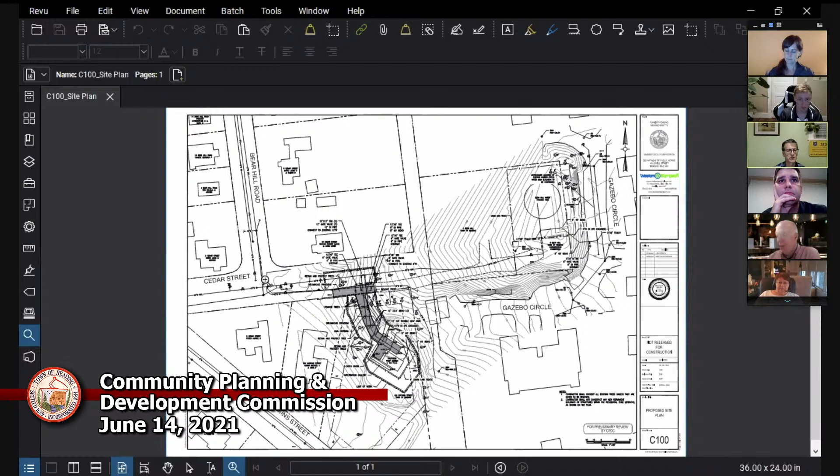So the pump station, as Ryan mentioned, is on a site that borders Hopkins Street as well as Cedar Street off of Bear Hill Road. Access to the pump station will be off Cedar Street, that's where the water main that currently heads up to the water tank is, and that'll be the suction supply for the pump station.

For those of you that have seen the site, the site has been, I guess, sculpted, as you could say. As Ryan mentioned, it's kind of like a golf tee. It's got a high point up in the upper right corner, and then there's a flat area where we'd site the pump station, and then a little bit of a hill drop, and then it's flat out toward Hopkins Street.

So the pump station, as Ryan mentioned, will be pumping water. What it'll do is it'll draw water from the water main in Cedar Street and pump it into the water main that circles around Gazebo Circle, and also back toward Hopkins Street, or South Street rather.

So what you see on the site plan is the gray hatching, which is proposed pavement and road extension. We'll be extending the road up Cedar Street a little bit, creating room for plowing, and then a driveway into the site with a T turnaround.

The road, or the driveway, will drop about 5 feet from street level down to the site. The pump station itself is about 16 by 25 to 30 feet long. As Ryan mentioned, it'll house the pumps, control equipment, and other issues relative to the site.

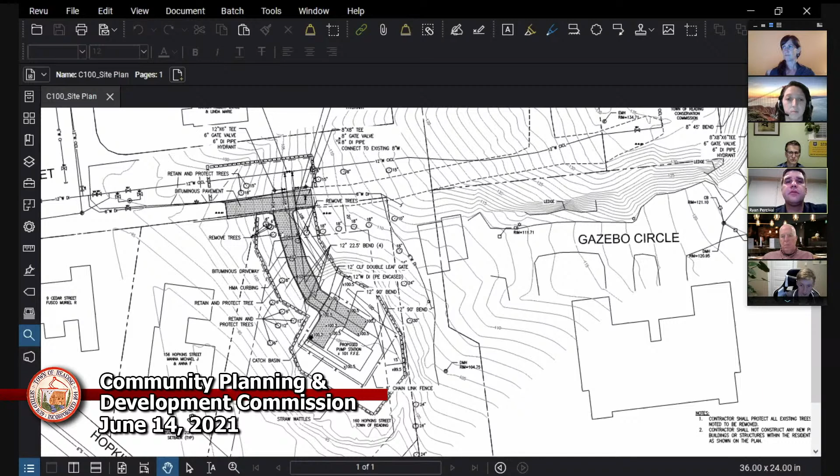Okay, at this point. And then an idea about how often someone would need to come to this facility? Typically it would be at most once per day or a few times a week. So really, worst case is one visit a day, and Ryan can back that up if he wants. Unless there's something going on there, like some repairs, in which case there might be some utility trucks there. But otherwise it'll be a very quiet site. Just to add to that, it's generally once a day, and it would be during work hours. Okay, thank you.

Other questions from the board? Yes, I have a question. I'm looking at this plan and I'm seeing 10 trees that will be removed. Isn't there a better access off Hopkins Street? And why did you not choose to go that way for creating your paved area?

Yeah, we came in because all the utility, at least the water main utilities, were coming in that way, so there's excavation required to come in that way. Okay. But we could potentially bring just the utilities underground and bring a road in from Hopkins Street.

One of our thoughts was that we were trying to keep all of the construction activity and the future use on the northern part of the site and leave the southern part open for recreation and access. With a driveway there, that might cut down some of that ability. But I think that's really a call for the town to make. We will design it either way, and this was our concept, so that's subject to change.

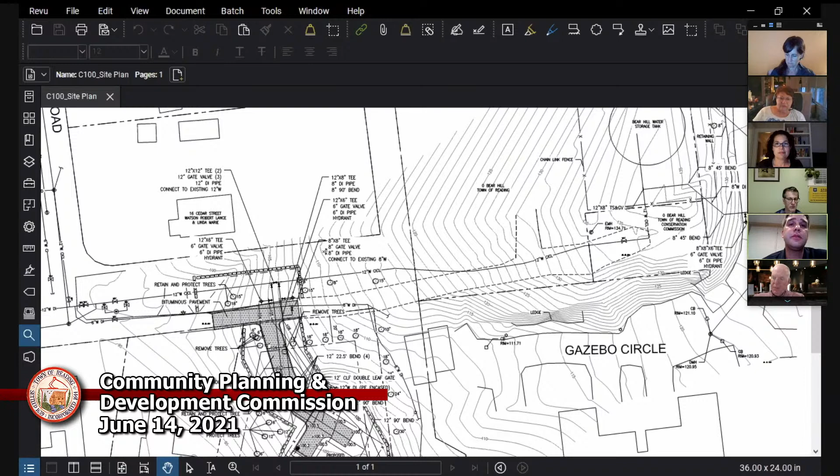We went through the same sort of discussion on the water tank project, and we have the ability to pick any color. Plastic, black usually is the best. It does disappear better than green, believe it or not. And we are actually not going to put up barbed wire in this case. I think a 10-foot fence would suffice, or 8-foot.

Okay, my other question is this. I thought the illustrations of what the design and how tall it would be were really helpful. And I'm wondering if those were available for neighbors to see in advance online. A very specific thing is somebody reached out to me saying, hey, I'm looking for like an elevation view or something. I'm just wondering what chance the neighbors would have had to get a feel for what the actual look of it would be before this meeting.

We can certainly provide an elevation view. I don't think that's an issue at all. I think one hasn't been provided yet because I don't know if we were certain on how the design was going to look after this first meeting. So we can put together elevation plans for the building—they have to be put together anyway, so we can provide those.

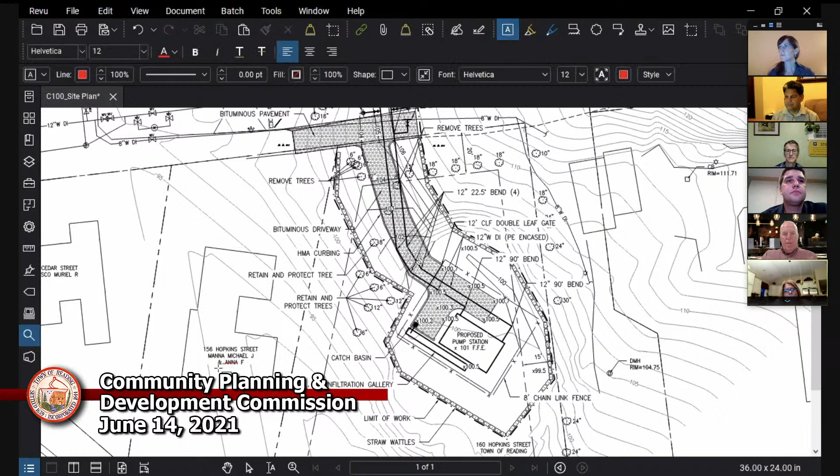One of my first concerns is when the surveyors were out surveying, they first were surveying up by the water tank to see if it could be put up there. So I'm just wondering, why was that ruled out instead of putting it down here? That's my first question. Okay, I can field that one.

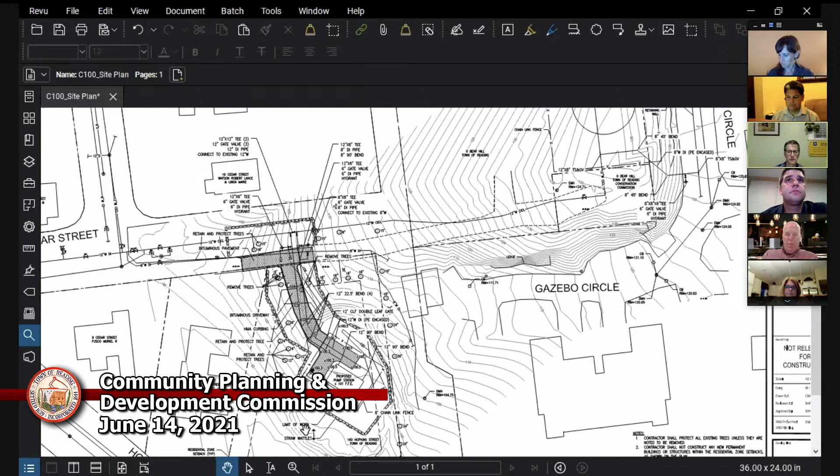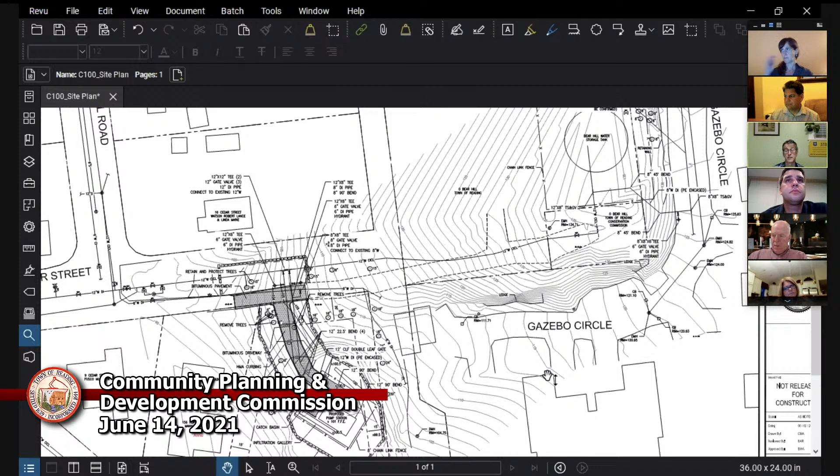The DEP requires a certain pressure at the pump station so that the pumps can pump effectively. And the elevation at the tank being much higher, that pressure is not high enough. So pump stations that increase pressure to areas are almost always at the bottom of the hill rather than the top, because they can push water up easily, but they can't suck it up, essentially, is what happens. And what can happen is when the pump station, when you need it most and the pressures are low, the pump station won't work to do what it needs to do. So that's the reason it's not up on the site. It's really primarily a hydraulics pressure issue, following state guidelines that we always need to make sure we have enough pressure on the pump station suction side.

We should add, if I could chime in here, we actually have some water main work up at the water storage tank, which is the primary reason the surveyors were up there in the first place. So Cassandra, if you could just zoom in up by the tank a little bit. And to Ryan's point earlier, for the redundancy, if the pump station does go out, we have this point of connection now, or we will have this point of connection to the top of Gazebo. And there's also the connection at the Gazebo Circle entrance.

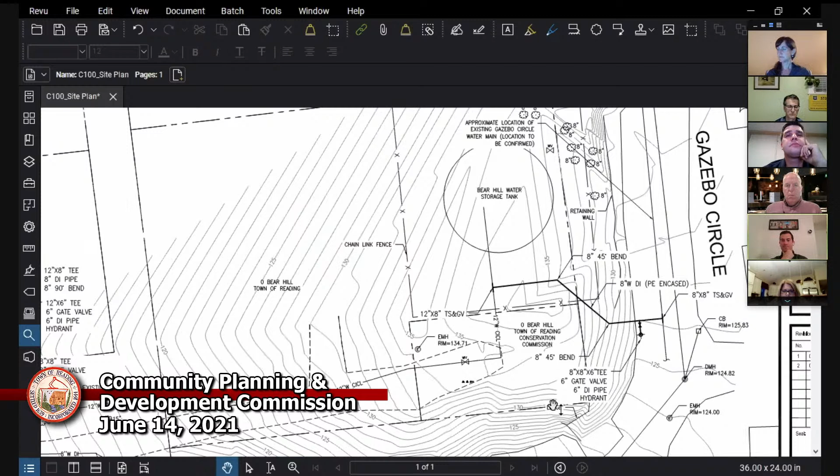So could you have an entrance up that way by Gazebo instead of coming up? No, the pump station has to be lower in elevation down the hill, and this is the best available site for that. The water main Ben was mentioning is really just to provide additional looping of water mains for better fire flows to the area. And that water main will now loop through Gazebo Circle and come all the way back down Hopkins, providing better redundancy for the whole neighborhood up there.

And I will add one thing: if you notice the plan, the driveway is shown kind of right on the property line. We're working with the town to identify exactly where the property line is. At least with the information we had, just from assessor's mapping at this point, it would indicate the road sort of meanders over onto your property a little bit. But anyway, just to let you know, that property corner will be fixed to assure there's no adverse impact to your property. Well, maybe I'm not understanding this map, but isn't it going straight up like Cedar Street, where there's already a dirt road there with the chain?

So wouldn't it be going up there? Up there, yeah, and then taking a right, probably up behind our rock garden. Right, we just want to make sure that we do have a line of hay bales set on the downslope area, and we want to make sure that no runoff, no construction debris or anything like that rolls down the hill into your rock garden.

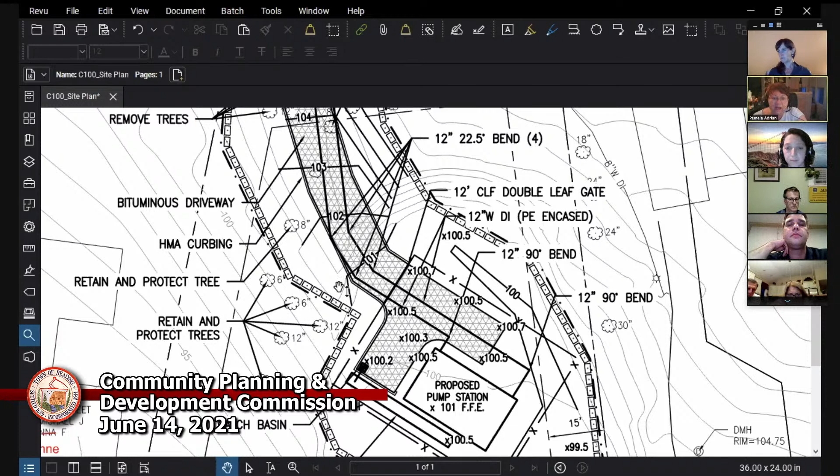No, I understand that. And then these are retained, as well as these, and these are also retained, so it would only be 6 trees. That's correct—six trees, but keep in mind 3 of those are 6-inch caliper trees grouped closely together. So if we were to replant in that exact corner, you may only get maybe 1 tree in that corner, and then we'd have to probably plant one a little further down just to make sure the placing is far enough apart so the growth can actually happen for those trees.

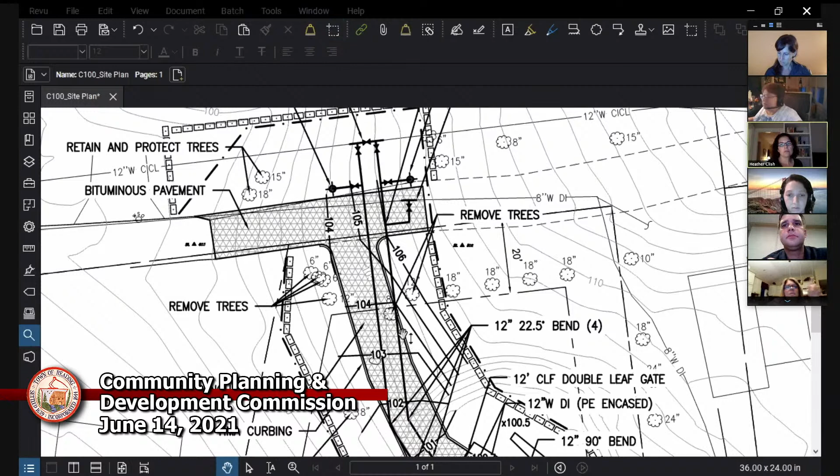And I have one last question too. I'm just wondering, is it going to have a light that stays on 24/7, like Gazebo has their lampposts, and especially in the winter they are very, very bright. I'm just wondering what type of lighting you're going to have there.

The lighting is really flexible and it's up to the town. Anything is possible—some towns like a light on all the time.

What's typical is the light that you see over the doorway, a small black fixture. They're typically on a motion sensor and would only turn on when somebody walks up to the door. But there is usually a switch on the inside, so you can leave it on motion sensor, turn it on if you want it to stay on while you're working there, or turn it off if it becomes a nuisance. We try to design these with full flexibility, because sometimes even with the motion sensor, just leaves blowing around can turn the light on.

So there won't be any high lampposts or anything like that. There is no intent at this time for a light that would be on all night up on a pedestal or a post. That's correct. Okay, thank you. Good question.

And to follow up on that, I assume, correct me if I'm wrong, that in a location like this the intent would be that it would be on a motion sensor. Yeah, we would probably start off with a motion sensor, see how much it gets tripped off by animals or anything like that, and then adjust accordingly. For something like this, it's a pretty secure facility with the fence and the doors, so routine maintenance is really why we're only there.

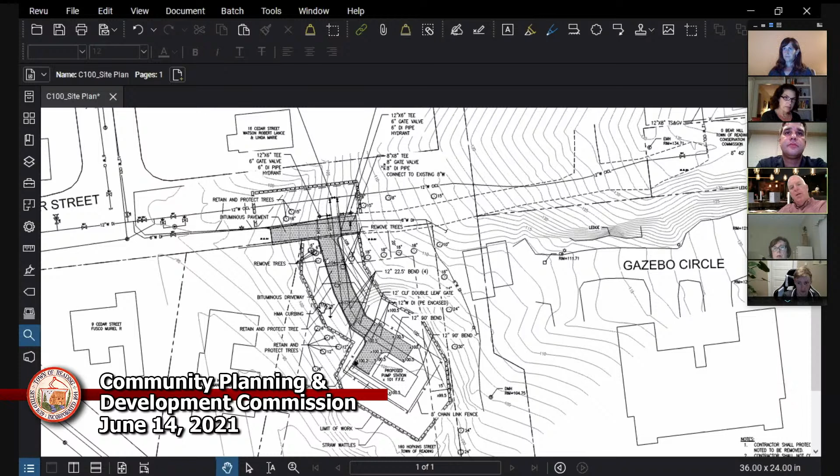I guess one other thought, Ryan—I know you talked about replacing the trees that are there, and I know you want visibility into the site, but I'm wondering, once you come up with a final configuration, whether there's some additional screening, whether arborvitae or other landscaping, that might be appropriate—not to create a complete buffer, but maybe a little softening so they're not looking directly at chain link fence. Yeah, I'd be happy to look into some plantings we can do, and maybe it would be beneficial to meet on site to see what might be possible.

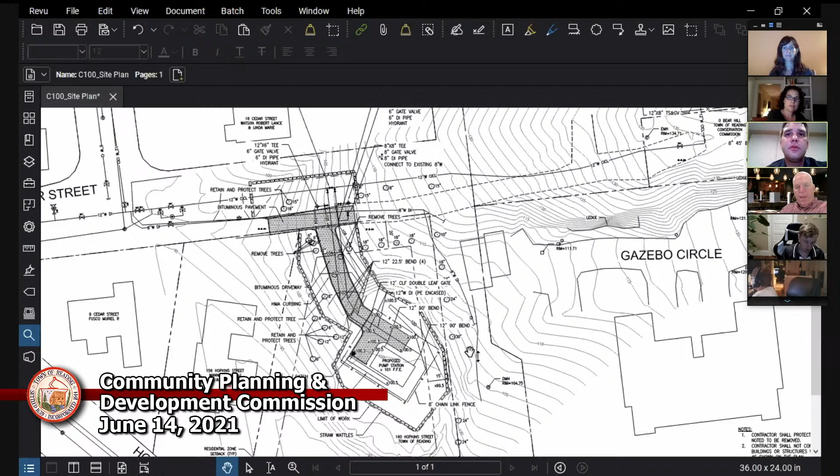And then the other thing I was thinking is, I don't know if you've done a lot of stormwater design up along here, but whether there's an opportunity to use the water that comes down this road that's not quite paved—whether something could be done to intercept those flows before they head toward Anne's house. Yeah, we did look at that, as most of the lot grades down through the Gazebo itself, and some of it touches the northeast corner. We'll see if we can intercept as much as we can. I know there's a swale on the northerly side of the property, near the 100-foot contour that wraps around the back of the building. Yeah, there's a 100 contour just north of the driveway.

Oh, yep. Nope. Let's go a little bit. Right there you go. Right there.

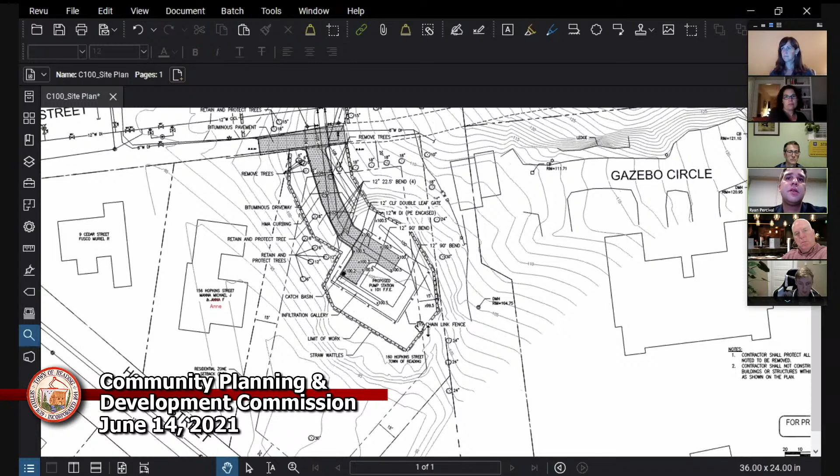So that's the intent of that, is to direct anything coming down off of that northeast site in and around and down the way it's coming down. There's a swale on the easterly side of the property as well. You can kind of see it.

That will effectively channel some of that out. Most of the runoff now will be intercepted by that driveway and mitigated that way. So once we know what the soils are a little bit better, we'll size that infiltration gallery or porous pavement, or both, appropriately.

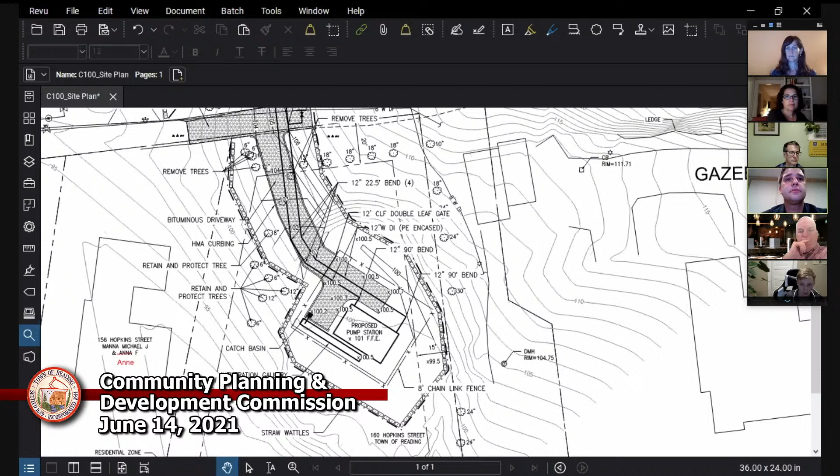Great. Other questions or comments?

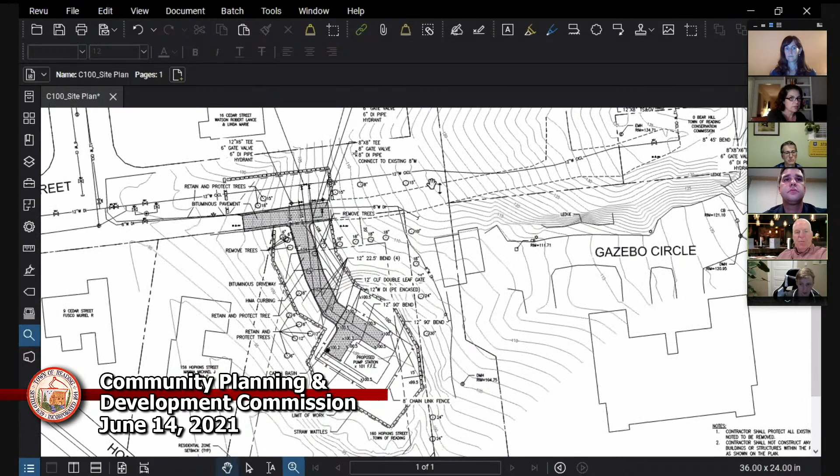So Ryan, I think there's a couple of things here, right? You're going to come back to us with some potential redesign, maybe not, maybe it'll stay the same, but sort of confirmation on the design for that site access for the driveway. I don't think you heard any concerns or criticisms or design direction related to the building itself. I think what was presented seems to fit pretty well.

And then certainly doing a little more digging on if there's any deed restriction, or probably, well, obviously there's not a deed restriction, but any other sorts of restrictions or promises that were made related to recreation on that site.

So, confirming that, and in the meantime you're going to meet with the neighbors to identify what trees you're looking at taking, and the layout of the site, and if there's other smaller improvements or tweaks that could be done to the design to make that all work. Right? Correct. All right.

So I think that we do need to continue this. Not major issues, but some issues to resolve before I think it makes sense to take a vote on this.

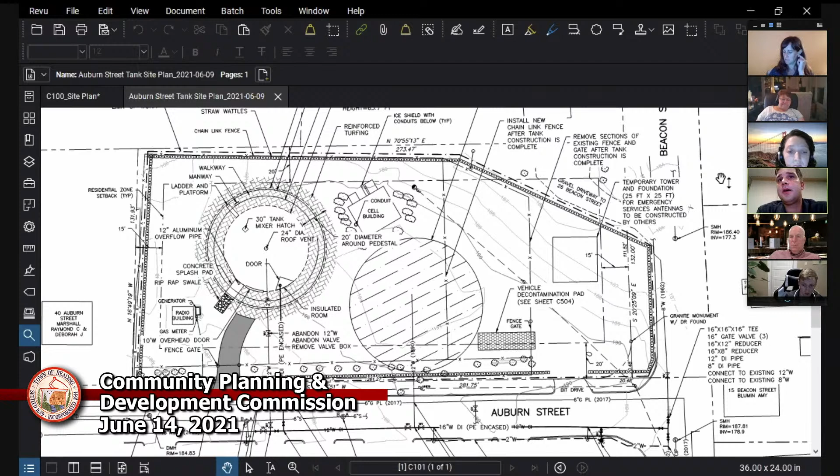And to answer your question, we're in the process of drafting the RFP, which the carriers are very interested in for obvious reasons because of the temporary structure they're constructing. But they're looking for a more permanent solution, as well as we are, on the new water tank. So that RFP for the leasing is being drafted right now with procurement, myself, and town counsel, and hopefully that'll be going out soon so they have a permanent location to go to.

That'll be more advantageous for their signals to go back on a higher tank than to stay on this temporary structure. It's more advantageous for them to be on the tank for coverage purposes than on this temporary tower, which is going to have limitations on where it is.

So remind me, the differences in heights, the tank versus the temporary cell tower. The temporary structure will be about 140 feet tall. At the top will be the town's equipment, and then there'll be, I believe, 2 carriers only on that monopole.

The reason it has to be at 140 is because the new tank going up is going to be a big reflective object in the way, sort of a line of sight issue. So at least for the town's equipment we need to be up well above that. The tank currently sits, I want to say, between 110 and 115 feet, depending on where you measure it to. That's where the difference in height is going to be, and it might be slightly different as we're going down gradient slightly, maybe about 2 feet shy of that top elevation.

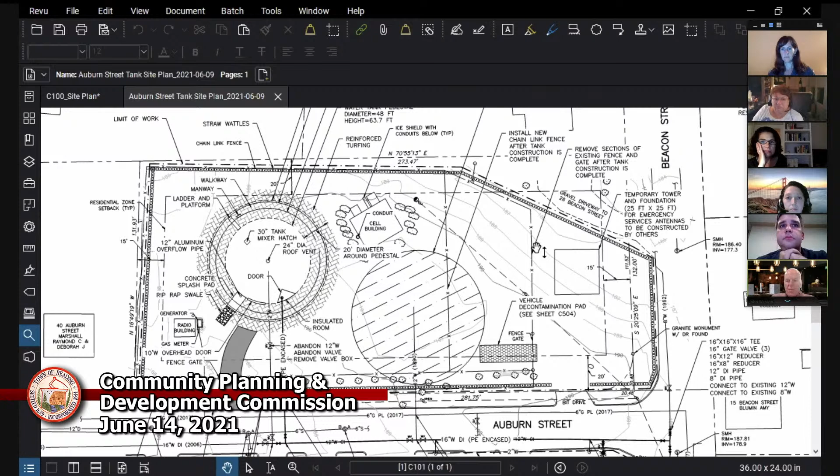No? Sorry, I was doing something else. Oh.

Is the vehicle decontamination pad also new? According to this plan, yes, but we didn't - the intent is really just to show the temporary tower. This plan was more for the construction drawing set that was going out. But yes, that's from what you saw - that's a big stone entrance that allows for the tires to be rumbled clean.

So, okay, back to the tower. First, when the RFP went out, did it not specify the 3 potential locations? It did not. It specified the northwest corner, which was what we had agreed upon at the last CPDC meeting, to use as our location. And that's how the RFP was awarded, based on that location.

With the loading requirements and everything we've seen and what we know from the loads, we know we're going to have an issue with the zone of influence for that water tank versus the cell tower. And it's also really a very tight location, to be honest. So that, coupled with the loading requirements, really makes it an easy decision to move it to the easterly side, which we have to do.

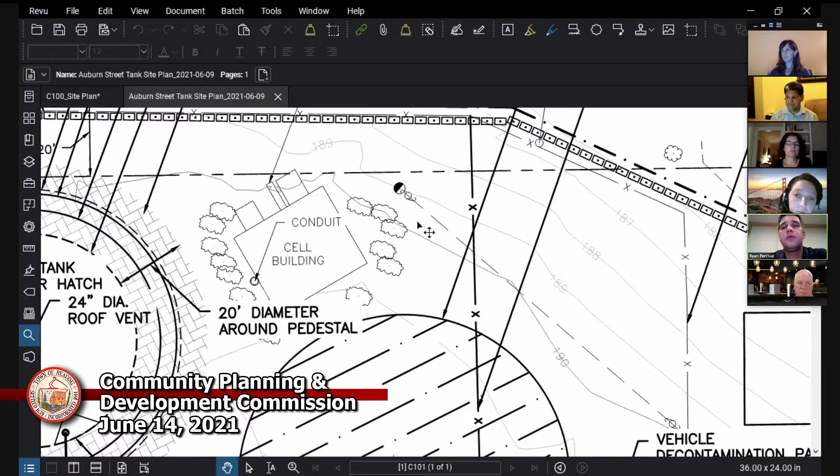Again, one of the locations on the last plan that you saw was in that back corner. I just explained when we went out there that back corner is actually too close to that overhead wire, and in the opinion of those who construct cell towers, that wire is too close. So it's just too tight.

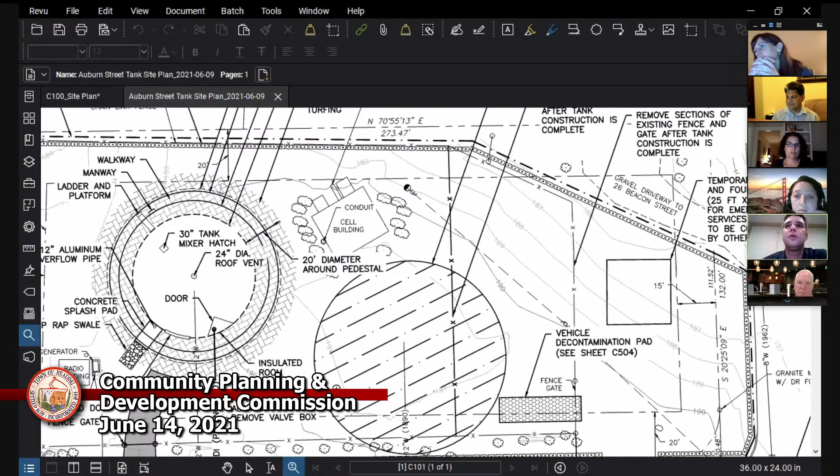In practicality, even when they're lifting this, it's a 140-foot pole. It does come in segments, but when they're lifting and placing this, there's a potential that it could hit the power lines and put workers in unsafe conditions. So again, when we have the trees cleared out of that area, we'll have a better understanding of the room we have and how tightly and closely we can shift this to the westerly side of the property.

I will tell you it's more advantageous for us to move it westerly as much as we can, because the town of Reading also has to place conduiting and wires from that location to our radio building. So if we can shorten the length of that, that's less conduiting and wiring, which is very expensive right now, than the town needs to put in. So it's advantageous for us to shift this as close as we can to the site in a very safe manner.

All right. Other questions, comments from the board? No. All right. Comments from the public?

Yeah, I know. Oh, Mark or Jackie, I see your hand raised. Yeah, I used Jackie's picture because I thought...

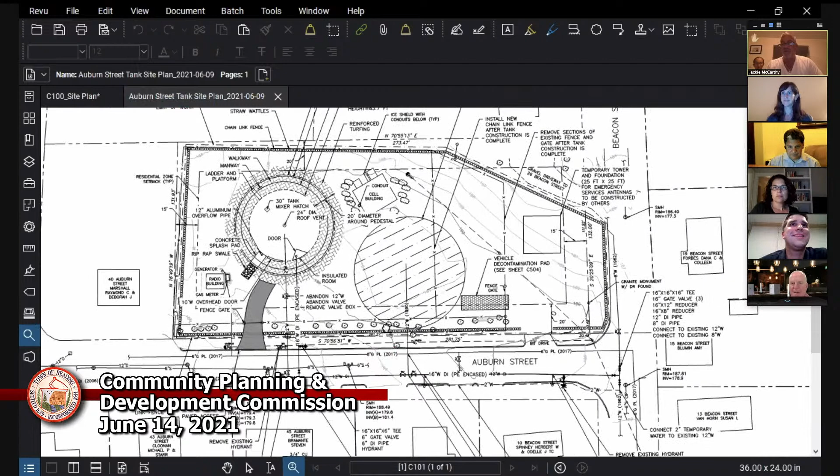Good evening, Mr. Chairman. Thank you, members of the commission. I have one question and two other modifications that I'd like to have considered on behalf of our neighborhood. My first, well, let me start off by saying that Ryan has spent a lot of time and the communication has been fantastic. So we have no issues with the work and the time. Ryan has certainly put it in and in talking to us regularly.

So he's done a great job. My question is, does the applicant intend to seek zoning relief for this temporary tower? That can be a yes or no question. I just would like to know if the intent is, do they believe they need zoning relief? And I can just leave that hanging out there. I can get an answer later, but I'd like to know what the intention is.

The important things, though, are the two modifications that we'd like to have be part of this. The first of which is a construction plan. The previous matter before the commission, they were asking for something similar. You can appreciate that we've got a dozen or more single-family houses within 100 feet of this site, some even a lot less, including my home. It would be helpful to be able to anticipate when certain activities are going to take place on the site, so we can make sure we have our windows closed.

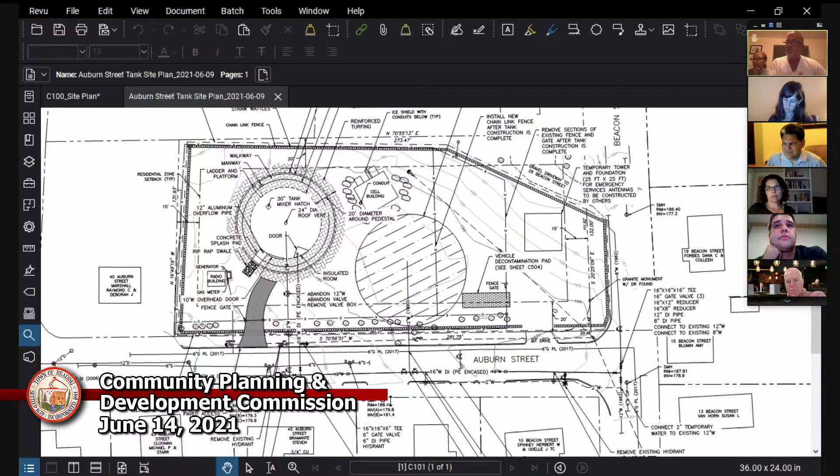As you notice, that's the open space mitigation plan to try to diminish some of the impacts of this project on our neighborhood. So all the trees are coming out, they're going to be tearing up all the dirt. What we're going to be left with going right through the middle of this open space is these telephone poles and wires. So what Ryan and I have talked about is, how do we relocate?

I raised this once before, those wires. There's at least 3 options we've come up with. One, and I talked to Ryan about these 2 - if you look in the left-hand side of the map, in the bottom left corner, there's the public safety building where their equipment is, their equipment is going inside the tank. So one recommendation was, why don't you have the carriers put their equipment in the public safety building? Then that whole side of the site is clear.

A second option is, instead of these wires and poles being there, why can't you run the wiring underground? You're taking all the trees, you're digging up all the dirt - that's the time, if you want to run those wires underground, economy of scale, it's the time to do that work. But I think a third option might even be the best one.

Ryan and I didn't talk about this, but if you follow that line from the bottom right corner to the building, you see the new fence line. There's the fence line - right outside, if you went straight down through that circle with the lines through it, from that telephone pole, there's a pole right outside the fence there, near Auburn Street. You can run the wires, and it's a much shorter run.

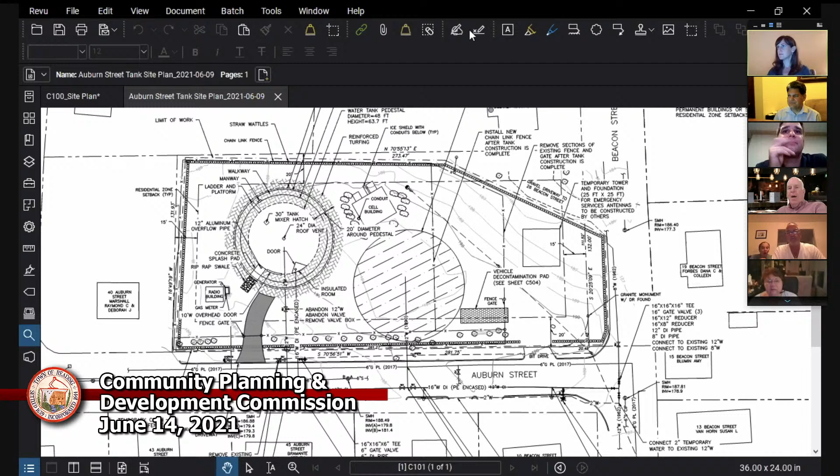Before you answer, I just want to keep in mind that everything's subject to funding at this point. I just want to put that out there that this will have to go in front of town meeting, possibly. I think the potential of that happening is very good given the fluctuation in steel prices and some of the scope that's increased on this project through this process, but it is subject to funding. And I am currently in front of another board that's concerned with value engineering on this project as well.

In the meantime, I just wanted to address Mark's comment about keeping the residents up to date. I'd be happy to do that.

We can do that through email if we can get an email chain together. I think that's probably possible. I think you guys have a good connection to the neighborhood, so we can do that. Once we know for certain what our construction schedule is going to look like, we can send that out and have updates and milestones - let you know when milestones are going to happen, like a demo of the tank, or when we're bringing in a big crane. We're going to want to let you know anyway, so I don't think that's a problem at all.

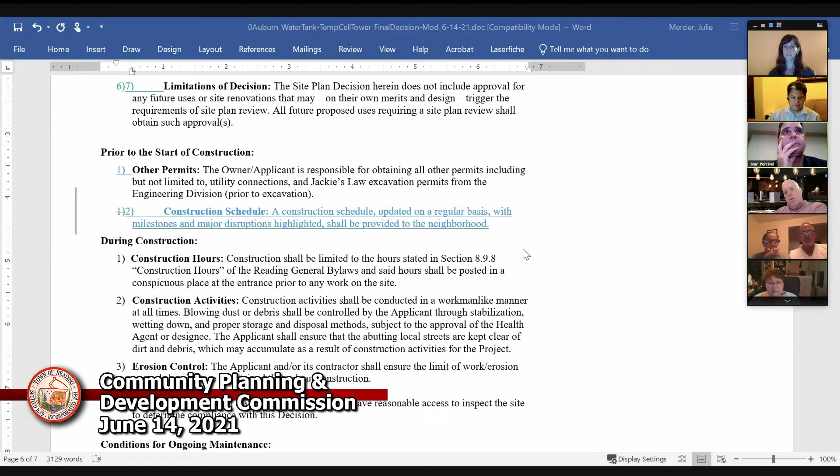And then I can show you the other one I just put in regarding the electrical. Should we define the neighborhood? I know Ryan, you said as part of an email chain or a text chain or something - is that going to be good enough?

That honestly, right, that's a way we all communicate, but it seems a little bit informal. So, I guess, let me just speak generally on what we do for most of our projects.

The neighborhood, to some extent a larger area, will get a reverse 911, what we call code red, prior to start of construction. They'll receive one of those when we have a major activity that potentially will shut down a roadway or something like that. Usually we try to limit that to maybe once.

From that point, we'll keep the engineering web page up to date as far as what we're seeing for activity on the project, what we've done, and what we potentially will see for the next week. That's what we'll do on a formal basis for the website. So if we're not grabbing everyone in that chain I just spoke of, they'll see it on the website as well.

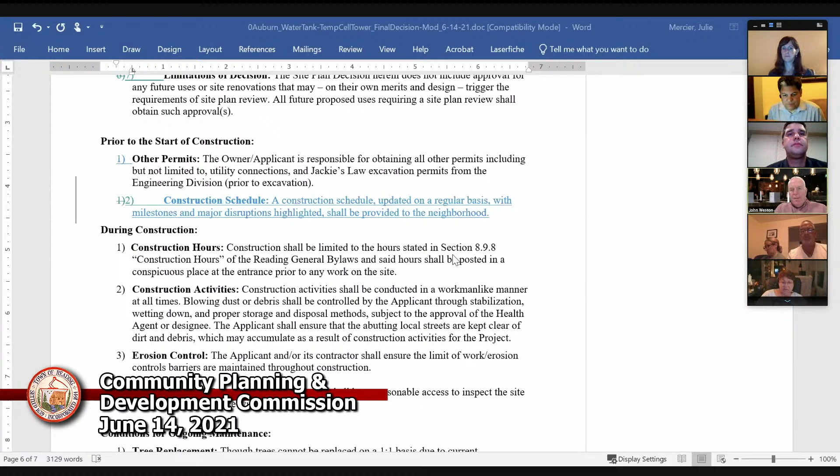Great, and then Julie, the other change there. So I just added it in under general conditions related to, here's the community use condition, soil remediation, and then I just put it down here.

I like that. Any other comments? Ryan, are you okay with that? I think that's fine, I haven't finished conversations with RMLD so I don't want to answer for them, but I think that's good. Anyone else from the board with comments on those changes? Those both look good to me.

I wanted to go back and make sure others had comments or questions from the public. Do we have any virtual hands up or real hands up? Seeing, I do not see any.

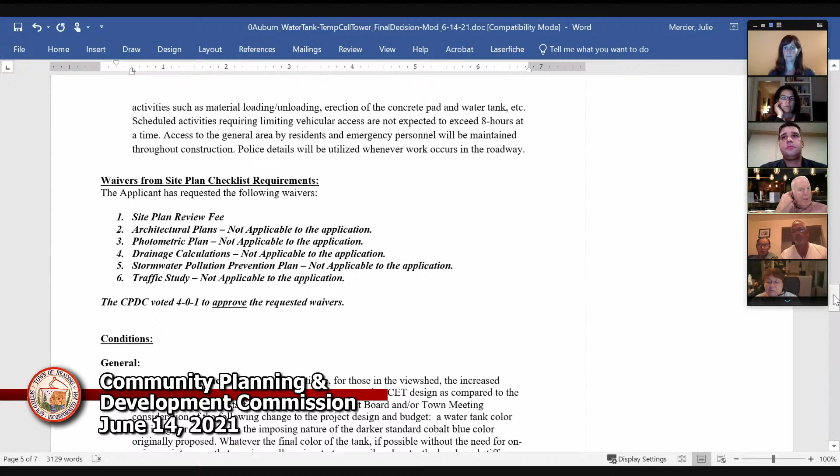I think this is something we can move ahead with. Julie, can you scroll back up? Do you want to go through the decision?

I just included the modification in with your prior decision since they're happening so close in time, for continuity's sake, so hopefully these records won't be lost 30 years from now. So anyway, the modification changes I just highlighted in yellow.

This is the information that was submitted, which will update with the plan shown tonight, which is just a more official version, slightly different than the one Ryan had marked up last week. Everything not highlighted is old from the prior decision. The new stuff, instead of northeastern corner, I just put eastern half of the site as depicted on the plan shown tonight. I'll have to get the detail about that to put in here.

I highlighted some questions that we had, and I wasn't sure if Ryan could clarify some of them. So here's the first one. I think construction aside, that's the only impact we'll have on that use, so it won't impact future use. It's just a timing thing, within the construction schedule.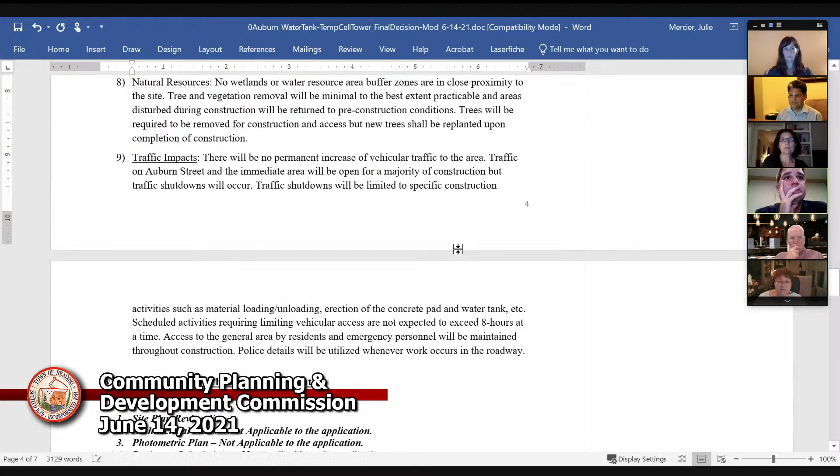The fence will temporarily be different than shown on the plan, right? While the tower's up, the fence will be like it. If memory serves me, I think we showed the fence to the extent of the limit of the property, but if it doesn't show that, then it will go to the limits of the property to make sure that we encompass a secure site.

But eventually it will go back to what was agreed upon, with that fence being moved as tight as we can to the westerly side.

Yeah, I guess it wasn't clear to me, or I don't have a recollection of the timing of the movement of that fence to its permanent location. I knew the idea was that you had to excavate all that soil out, right, and presumably you'd be taking the fence down then while you're doing that, and then you'd need to secure the site. So my presumption was that soon after you did the soil excavation, you'd move the fence to the permanent location, although I don't think that was ever specifically said.

No, I think that's accurate to say that when the temporary cell tower is decommissioned, then the fence will be moved, right, maybe even before that. But it's kind of hard to say means and methods. I would say either shortly after that tower is decommissioned and we don't have to secure it anymore, then that permanent fence is moved to its location, or if we have the ability to move that fence just prior to decommissioning and then remove the remaining security fence afterwards. But the safe bet is when the temporary tower is decommissioned, the site will be secured in its final fencing plan.

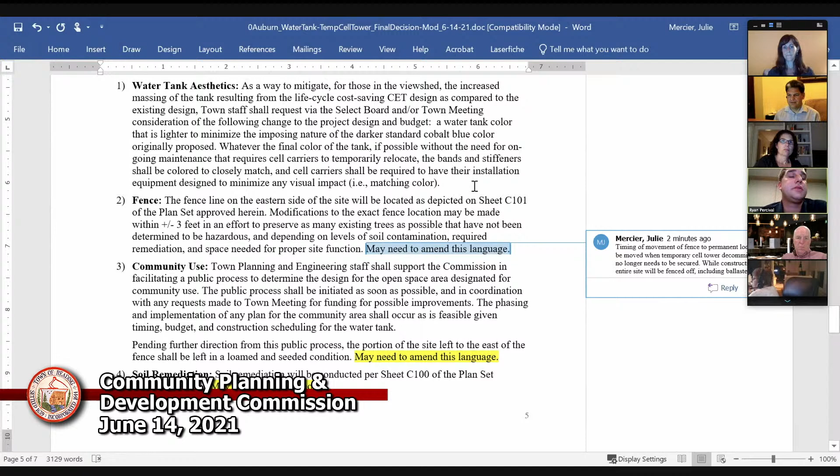So I might add some clarification to this condition, to talk about the timing of this, the location of the fence, so expectations are clear. I would just say that the permanent location of the fence will be done. That's usually one of the last things we do, as we're clearing up, loaming and seeding, we're putting up the final fencing and all the site amenities.

This I think you already addressed. As well as this. Yep.

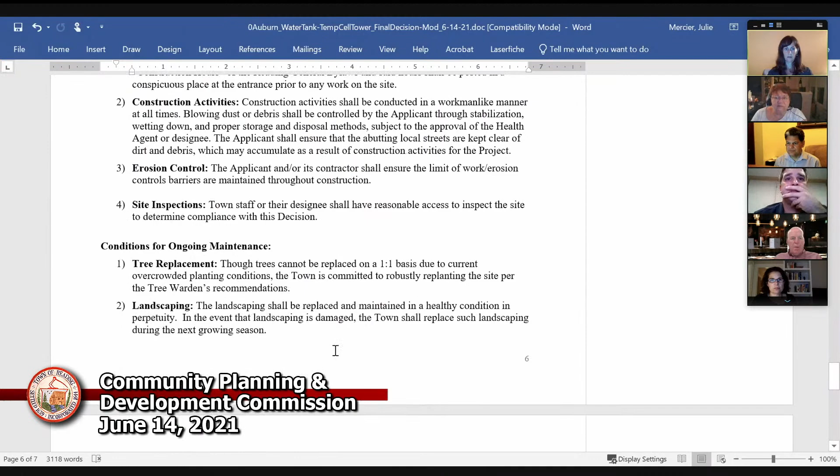And I think that was all that I had. All right. Other comments, questions, or discussion? According to the RFP, is there an end date for the temporary cell tower?

I will, there is something in there, but I'll have to confirm it. I don't have it in front of me.

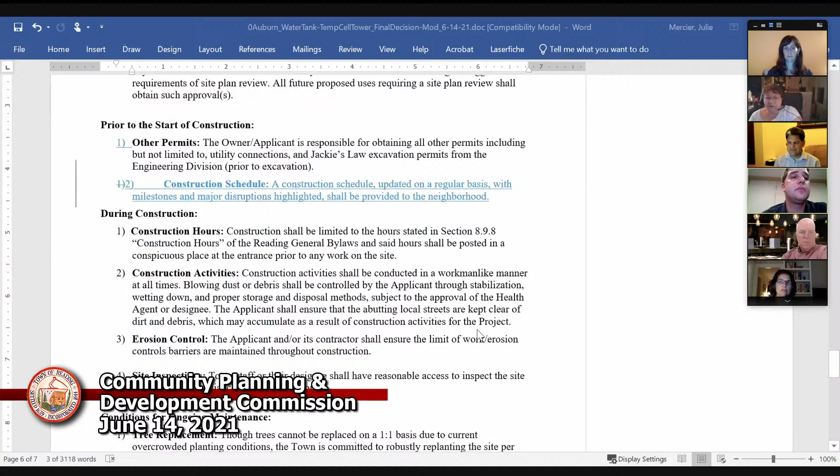Could we put in the condition that, as per the RFP, the cell tower will come down? I know we joke about it staying up for 30 years, but I'd prefer something to say it is coming down at a given time. I believe that's addressed in the RFP and contract itself. I don't have it in front of me, so I can't read it off, but it would be controlled under that agreement, under that contract.

Do you know if it was based on any other condition as opposed to a straightforward date? It was based on our best construction timeline that we could think of. So there's probably X amount of months from erection of the tower in there. See, I would have thought it'd be X amount of months from erection of the tank.

No, this is for the whole length of how long the tower will be in place. But if the tank project gets delayed for some reason, and you set a date specific for the tower, then the tower would need to come down before the tank is complete. Again, it's a contract with the town and the carriers, and if that were the case, that could be amended fairly easily, because obviously there was some issue that had happened where we had a delay in construction, and that would not be the fault of the carriers.

I don't have that RFP sitting in front of me right now, so I can't speak. Since Julie does need to make some modification, we're going to vote on this with Julie still making some changes to it after the fact, but the intent is here. Would we feel comfortable voting on this with the intent of the end date of the tower being included in that temporary tower section, and Ryan giving that to Julie to include? I would find that acceptable.